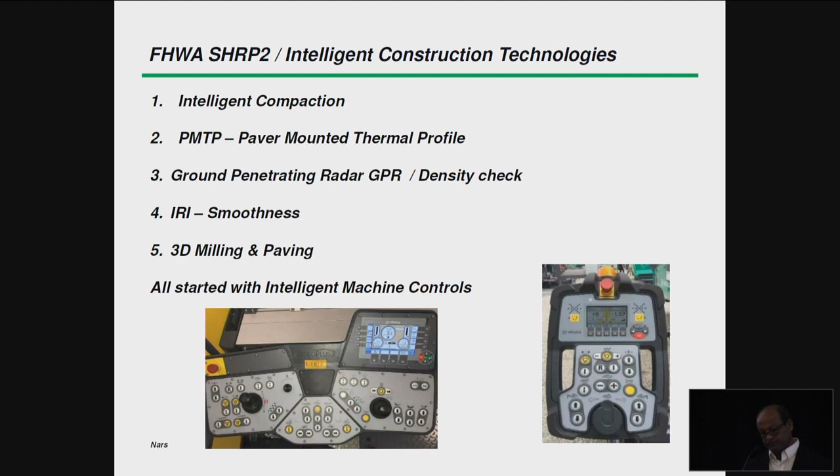Let's do a quick review of what an asphalt paver is and a free-floating screed. An asphalt paver consists of a tractor and a screed. There are several types of screeds, but as far as 3D paving is concerned, it does not matter. The tractor is attached to the screed arm where it pulls the screed at what we call the tow point or pull point. The tractor is connected to the screed through the leveling arm, which is connected to the screed arm. The screed itself pivots on each side onto the screed arm. There's a screw we refer to as a thickness control screw that the operator could manually increase or decrease the mat depth. If the operator turns that screw, he will momentarily increase what we refer to as the equilibrium angle of attack.

The operator could also leave the screw alone and jog what we refer to as the tow point cylinder. So when the operator turns the screw, he's increasing or decreasing that angle of attack. He could achieve the same by running that tow point cylinder up and down. The tow point cylinder is connected to the leveling arm, which is connected to the screed arm. So if I run that up, I could increase that angle. If I run it down, I could decrease the angle. So that's two ways the operator could increase or decrease the mat depth.

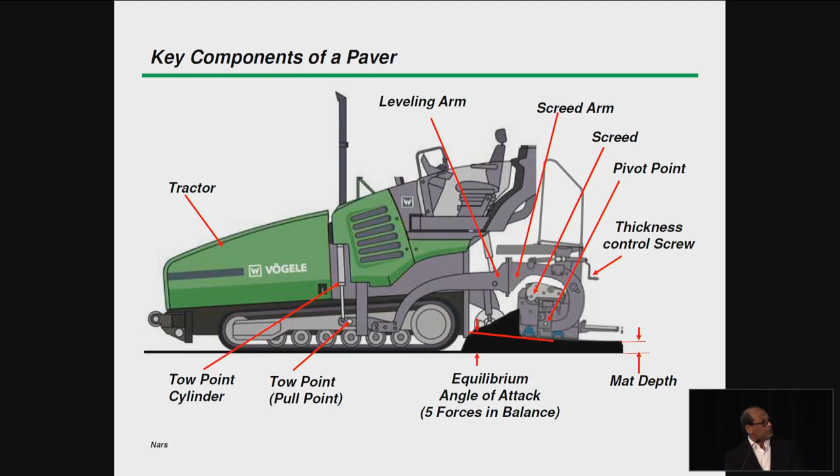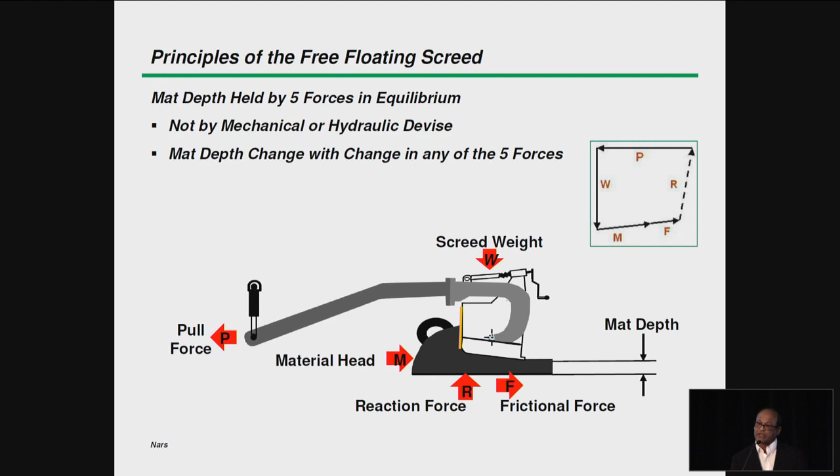We could also use an automatic grade and slope system to follow a known reference to accomplish the same. That reference could be a physical reference or it could be 3D coordinates. The screed is held to grade by 5 forces. Any change in those 5 forces would also cause a change in the mat depth. So we could manually change the mat depth, we could automatically change the mat depth, or the mat depth could change unknowing to us if any of those 5 forces changes.

So we could increase the mat depth manually using a thickness control screw or using the tow point, or we can automatically increase or decrease the mat depth with an automatic grade and slope system. Whenever we make those changes, it takes 3 to 5 times the length of the tow arm for the screed to find its new equilibrium position. So the screed is like a water skier being pulled by a boat. When you make a change, it takes time for it to find those 5 forces back in balance to seek the new grade.

So I could increase my mat depth by turning the screw or by using the tow point cylinders.

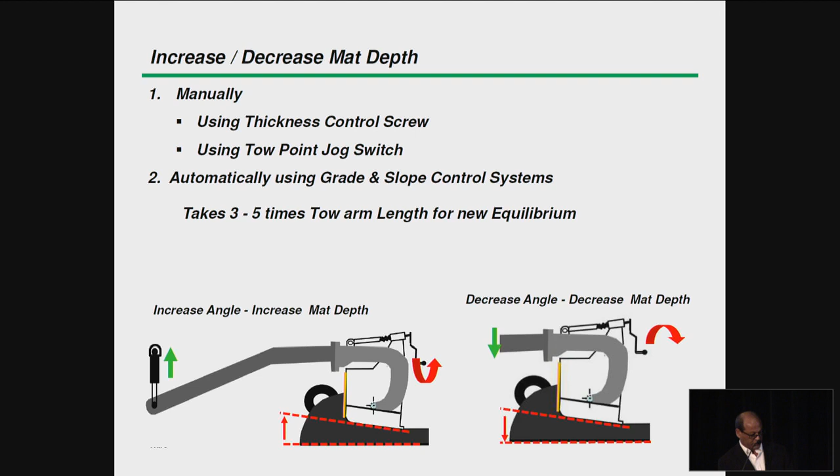So if we use an automatic grade and slope system to control the mat depth, we could either use a physical reference or we can use 3D coordinates.

As the tractor goes in and out of the highs and lows, if we have a known reference, assuming that the front wheels go into that dip, the tow point cylinder will go down. When we say the tow point goes down, we change mat depth. But we also say it takes 3 to 5 times the length of the tow arm for the screed to reach its new equilibrium point. So a short variation in the mat depth does not give the screed enough time to react, so it would fill that mat depth. When we get into longer swales, the screed could react and carry the depth in.

If we use an automatic grade and slope system, we can follow a known reference and compensate for those variations in the base, whilst at the same time compensate for variation in changes of the 5 forces that hold the screed to grade.

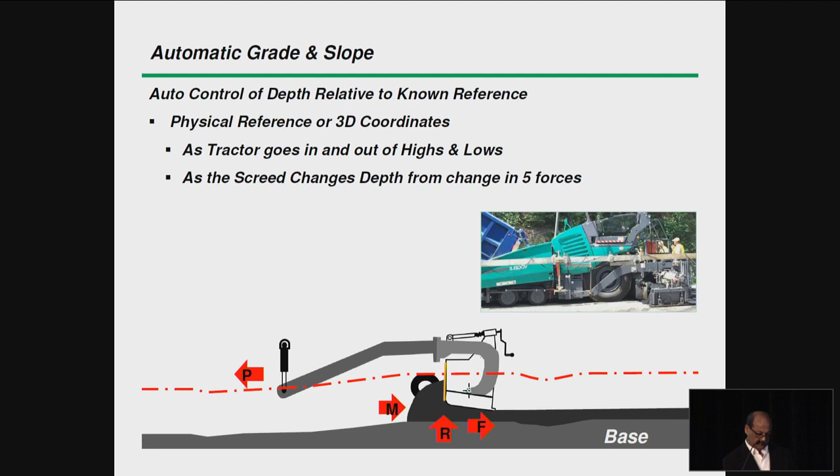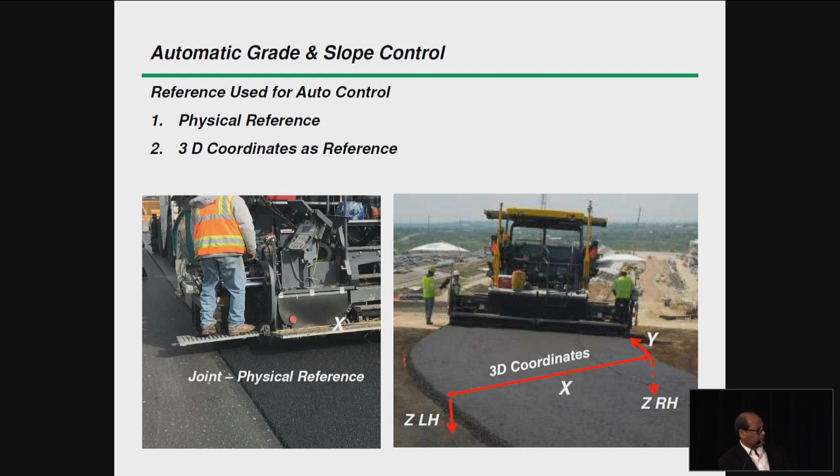So, following a physical reference using an automatic grade and slope system, we need three things: we need the physical reference, we need a sensor to monitor the reference, and we need a machine control. So the sensor monitors the reference and tells the machine control what to do. And it's really easy - it's up or down, left, up or down, right.

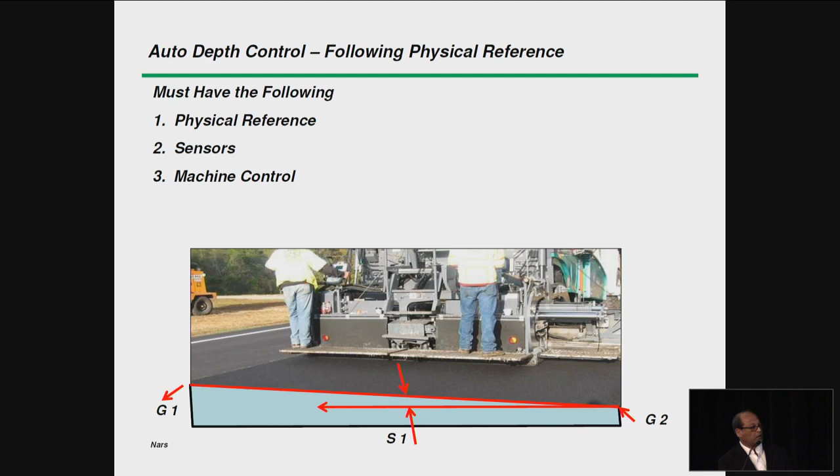So we can control depth, or we can control all three dimensions of the pavement. First we'll look at controlling depth only, which is what we do mostly today. It's controlling depth. On rare occasions, we control all three dimensions of the pavement automatically.

So reference sensors are usually a joint, a string line, a curb, or we can use an averaging ski and average the base.

Sensors could be the sensor that reads the joint, which we refer to as a joint matcher. Or we read the slope of the pavement with a slope sensor mounted on a beam that attached to the tow arms that control the mat depth.

So when we're using physical reference, it's usually a joint sensor or a slope sensor, or a joint sensor and a slope sensor. We can run joint on one side and slope on the other side. So we control the depth on one side of the pavement, and we hold a cross slope of the pavement.

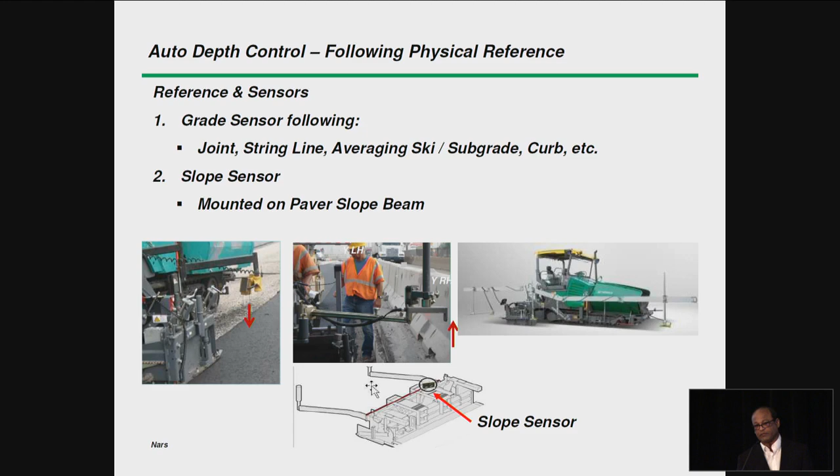Machine controls could be integrated controls to the paver control, or it could be a third-party system. You'll hear these names over and over in my presentation: Topcon, Leica, or Trimble, which are the three big players in positioning instruments.

Machine controls are usually on the paver. So we could have an integrated control system where the sensor talks to the integrated control to control your grade. Or we can have a third-party system to tell the machine what to do.

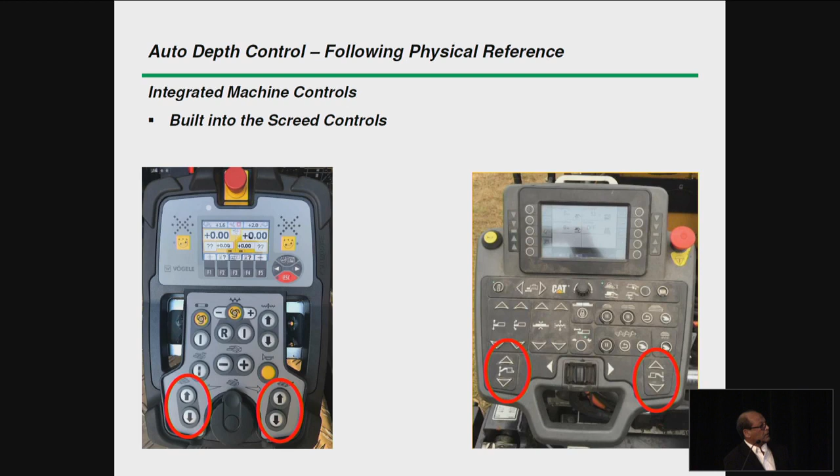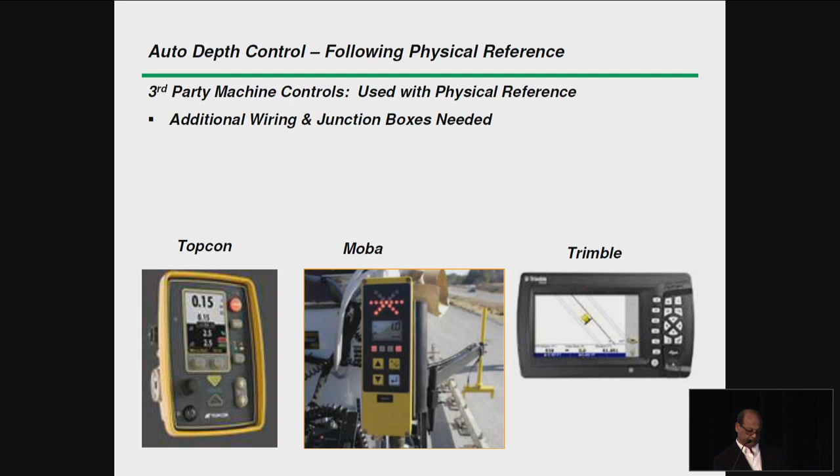So that's following physical reference. Why 3D? 3D eliminates the need for physical reference. Physical reference sometimes could be very expensive, especially if it's a new project and you have no reference to go off. So 3D systems eliminate the need for physical reference.

It's usually safer because you have less trip points. And you can use the same 3D positioning instruments for all the dirt work. So you notice I'm focusing on 3D positioning instruments, and 3D and machine controls.

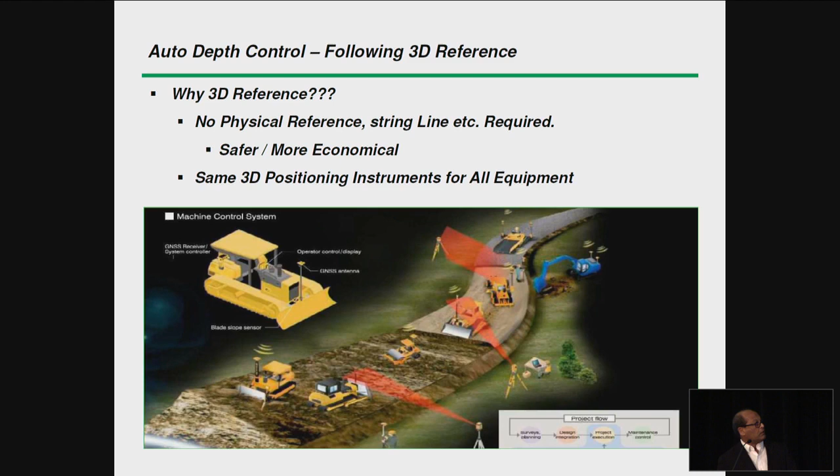So if we're paving, controlling depth with 3D, we could eliminate the need for expensive string line. As you can see here, that's a brand new project. There's no reference to go off. Where would the operator steer off?

To maximize smoothness, maximize your joint, to have a proper joint, you have to steer a straight line. To steer a straight line, the operator needs a reference. So if it's a new project, you have to survey it and put survey stakes down for the operator to follow. We can use the same string line as a reference to control the grade. That could get very expensive.

If it's a new project, the file's already designed, it's already available, we can take that information and plug it back into the paver and let the paver follow that reference.

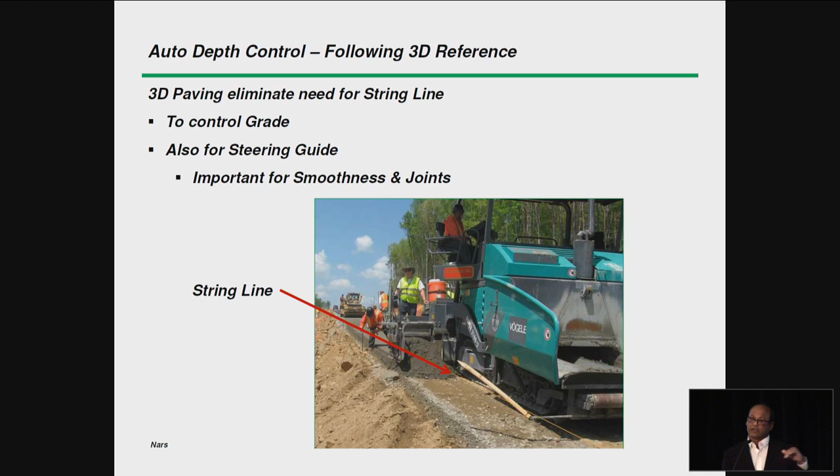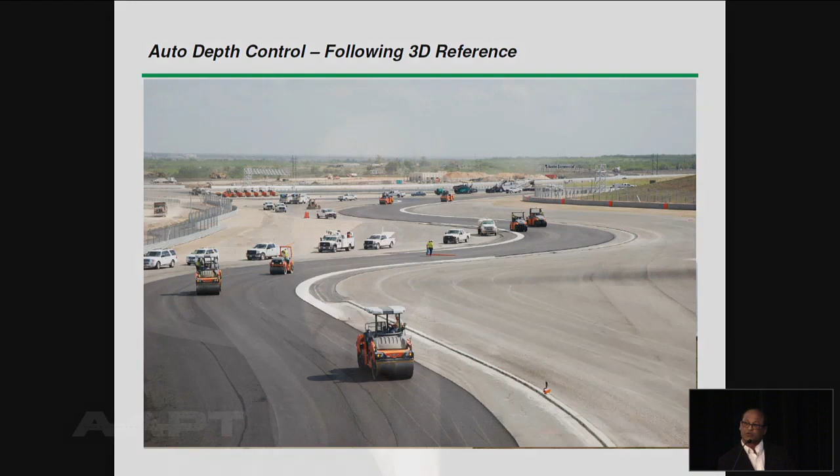These are some typical applications where 3D becomes very handy. As you can see here, that's a very complicated or complex profile of the pavement. So if we could steer the paver with the 3D job file, it makes it a whole lot easier for the operator to maintain consistency of those curves.

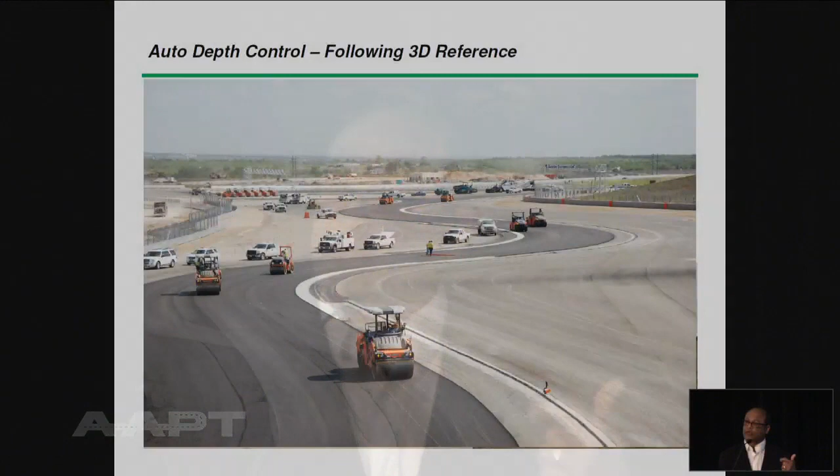So we have a better product at the end. It also eliminates the need for the manual input of the operator to follow that complex pavement. So 3D also eliminates the manual input.

We could also do 3D mill. If we do 3D mill, then we already establish a smooth base that the free-floating screed could follow. So if the base is smooth, and we can always profile it and tell how smooth the base is, so more than likely, if you do 3D mill, you don't have to do 3D pave because we already established a smooth base.

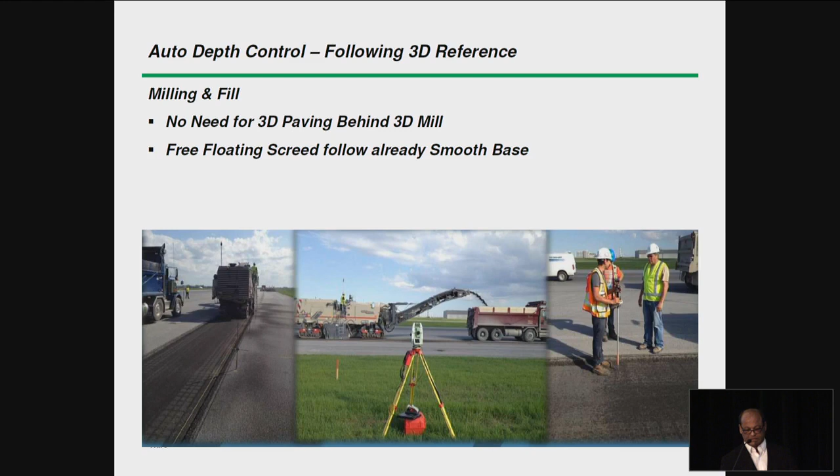So to do 3D paving, these are the things we need. We need 3D job files. We need 3D positioning instruments to tell the paver where it's at and what the depth needs to be, what the width of the pavement needs to be, what direction the paver needs to go. And then we need machine controls to take that information and control the machine. So three things we need are 3D files, 3D positioning instruments, and machine control.

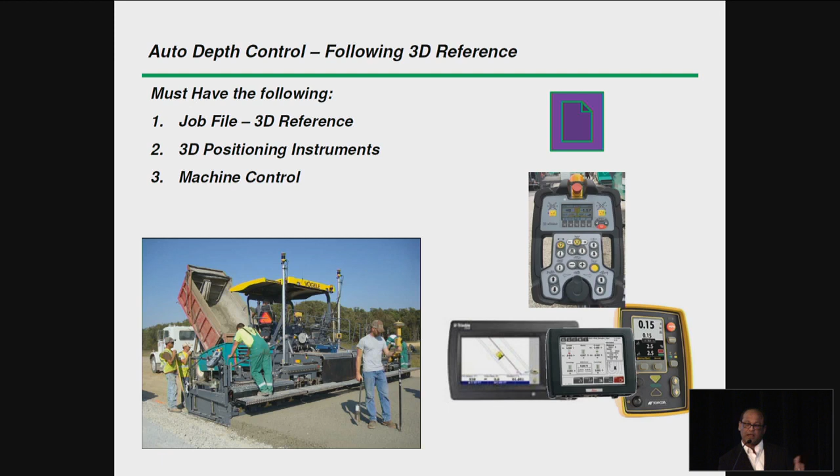The 3D files could be for a new project, the design file, or for an existing project, existing pavement, we can scan the pavement either with a high-speed scanner or we can survey it. Then we can take that information and build a 3D file. Then take that and feed it back into the paver and let the paver control the depth of the pavement based on the information we input into it.

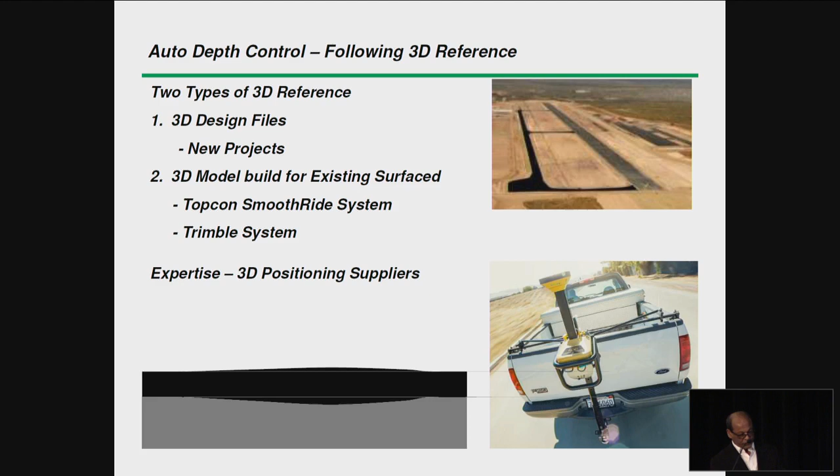So let's say we have an existing base that's got highs and lows. When we scan that surface, we can find the low spot, we can add X amount of material for roll down. So when the paver comes by, it puts X amount of material to compensate for the low spot, so when the roller comes by, we have a smoother pavement.

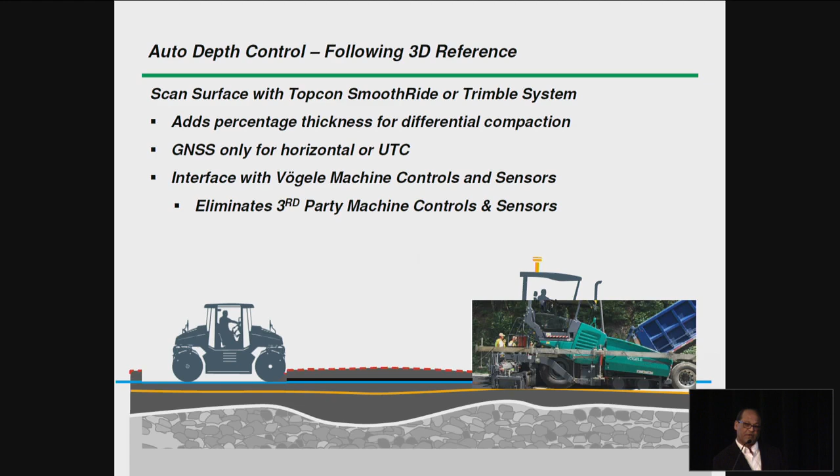These are latest technology, these are evolving technologies. This type of technology could eliminate the need for, in some cases, doing a leveling course to create a smooth base before we do the final pavement. So these are some of the advantages of this type of technology.

There are 2 types of 3D positioning instruments. There is what we call UTS, Universal Total Station, or millimeter GPS. They're from different suppliers. UTS uses a universal total station, and millimeter GPS uses satellite and GPS for location, for X and Ys.

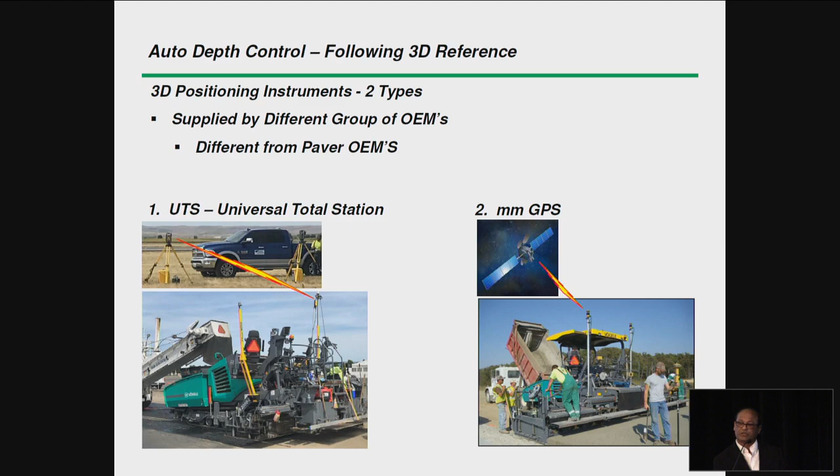UTS has to use multiple stations so you can pick up from one to the other and not lose control. You would need at least 3 total stations if you use the UTS technology: 1 for tracking, 1 for transition from one to the other, and of course we always need to constantly check grade because remember, input equals output. So we need another total station for grade checking.

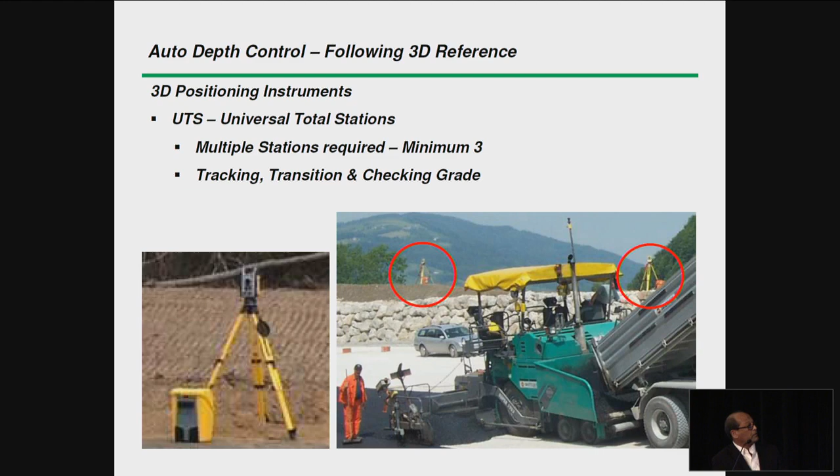These are some of the typical instruments that are used for 3D positioning or 3D paving. So we have the total station. We need control points for the total station to work off. The total station communicates with the machine target to tell the machine where it's at. All these instruments are communicating with each other through a radio signal, so we need that.

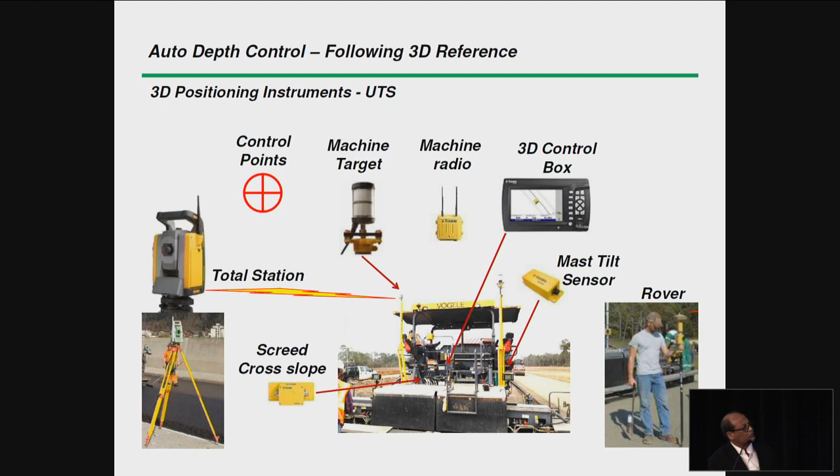Then we have the 3D control box, which takes the 3D file and tells the paver what to do. It talks to the machine control. Of course, we need to sense the mast. If we're going in and out of super elevation, we need to calculate when the mast is tilting so we can recalculate the X and Y. We also need a slope sensor that will tell us the cross slope of the pavement. And of course we need a rover to constantly check the mat depth to make sure that we're getting what we expect. So that's some of the stuff used with the universal total station system.

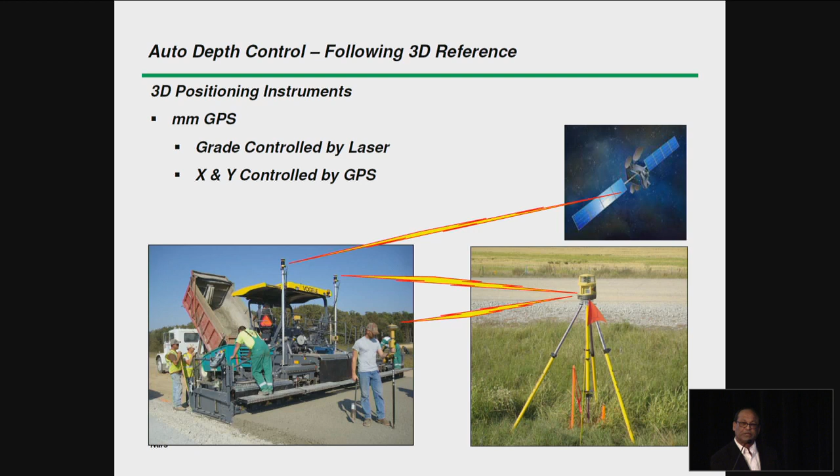The millimeter GPS, of course, needs satellite to tell us where we're at. Usually millimeter GPS is not accurate enough for the accuracy we're looking for in depth. So whenever you use millimeter GPS, we use a laser to give us the mat depth. So millimeter GPS positions the paver, laser tells us what the depth is. With this concept, you have the GPS system, GPS and laser system. Again, you have a 3D control box. And of course we also need a rover to constantly check our mat depth.

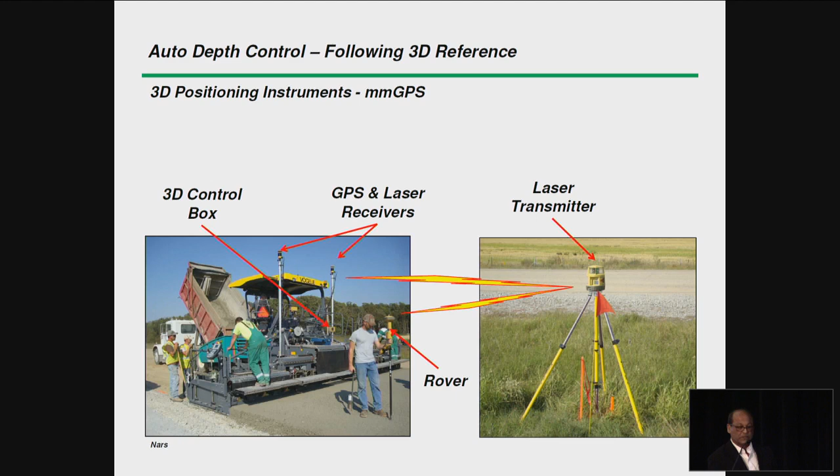Pros and cons for these systems. Usually when you use the UTS system, you need multiple stations, and you have to be careful that you don't have blockage with your total station. If a truck goes by or a wall gets in front of you, you block your signal and lose your position. So that's typically one of the disadvantages, along with needing multiple stations. You can have obstructions like walls, overpasses, bridges, trees, those types of things that block your signal and you lose your X and Y position.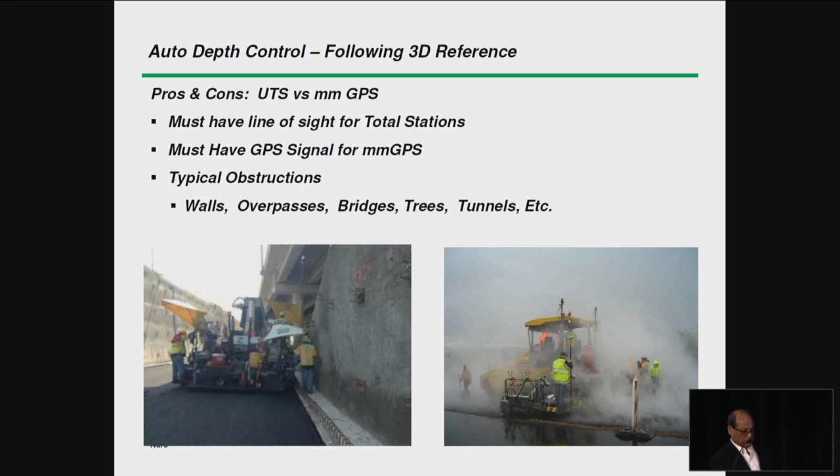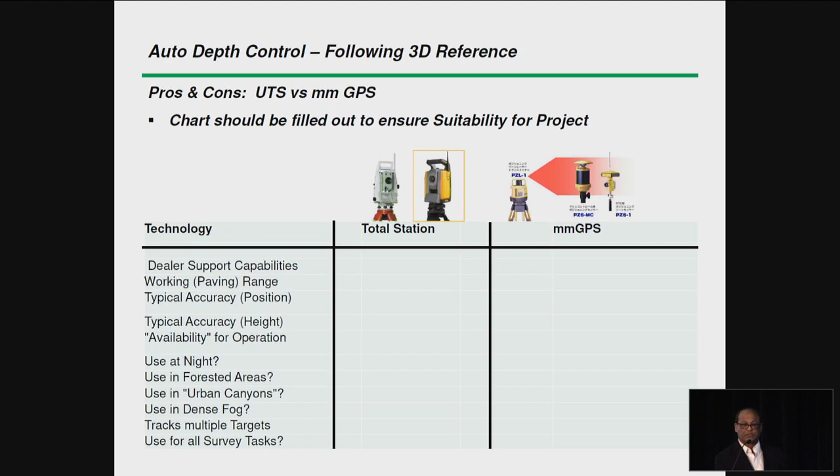To determine what's best for your project, there are several things you need to look into, and you can see some of them there. I'm not going to go through it line by line, but if you choose to get into a project like these, you need to investigate your project, look at the pros and cons of the UTS system and the millimeter GPS, and then determine which is more appropriate for your project.

We always have to constantly check mat depth because input equals output. If your file's incorrect, it tells the paver what to do, and the paver will do it. So we have to be very careful that we have knowledgeable people available when using these types of projects. There are two groups of knowledge: machine control knowledge and 3D positioning knowledge. 3D positioning knowledge also includes creating a 3D file, so you need surveying knowledge, positioning instrument knowledge, and machine knowledge, which includes paving knowledge. That's usually difficult to find.

What we find mostly on projects is the 3D positioning guys get involved, sell the contractor the package, start it up, and walk away. Because the machine lays the pavement, most of the blame goes to the machine. So it's very critical, if possible, to specify the knowledge required for projects like these. The contractor must have the knowledge to run these types of projects, otherwise you can quickly get into millions of dollars of lawsuits, which I've seen in the past.

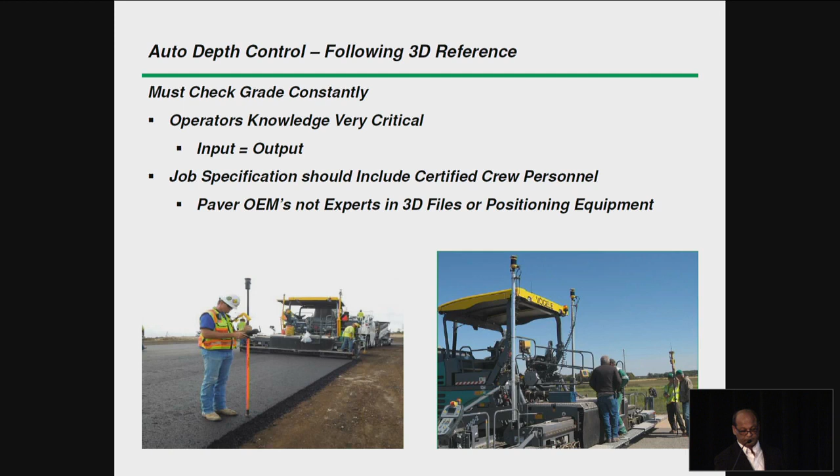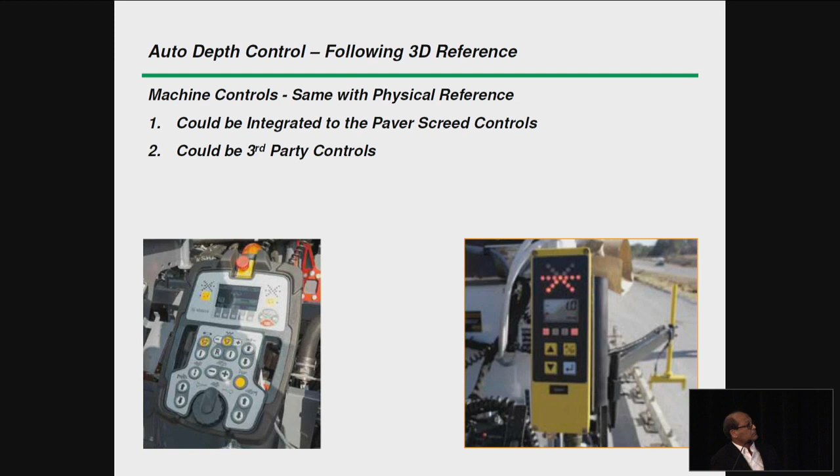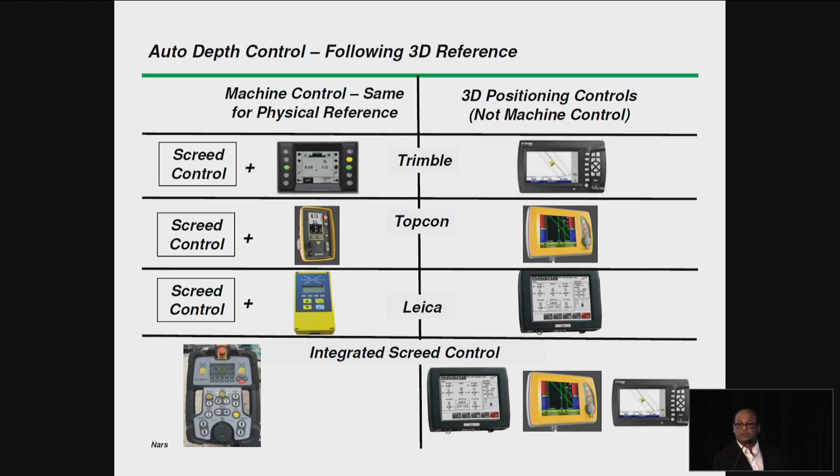If you use a Trimble system, then you need a Trimble 3D positioning box, a 3D machine control, and screed control. Likewise for Topcon or Leica. If you use an integrated machine control, then you avoid those additional instruments, additional wiring, and junction boxes.

So, controlling depth, width, and direction. So far we looked at controlling depth. We could also steer the paver and control its direction. So now we can take a 3D job file and do depth. Our industry today refers to depth alone as 2D paving. That's incorrect. 2D paving is controlling depth and controlling width.

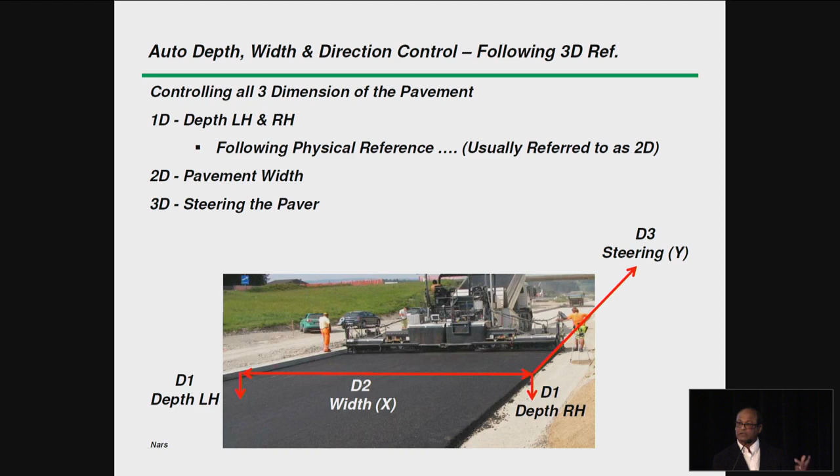That's two dimensions. What our industry refers to as 2D paving is actually following a physical reference. Following a 3D job file, you can control the depth, the width, and the steering based on the file. Again, we need 3D positioning instruments and machine control. But now that we're controlling all three dimensions, we need additional sensors on the paver: a sensor to tell us the width of the screed, and sensors to tell us the direction the paver needs to go. All of that now belongs to the machine control.

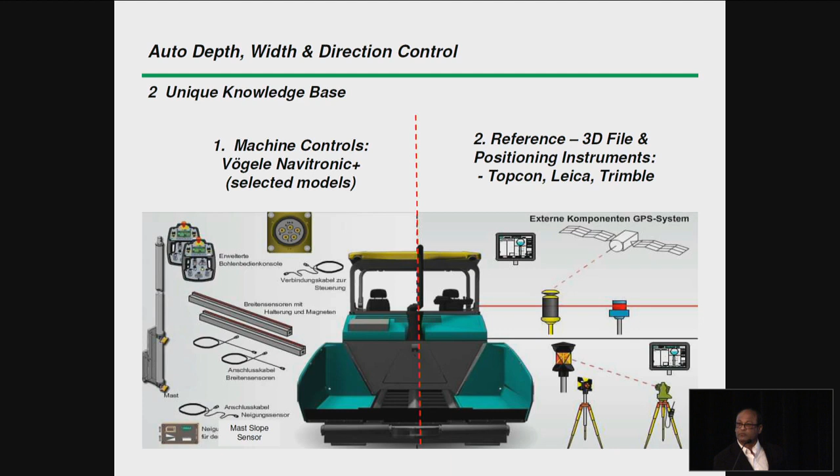So again, two groups of knowledge: machine and 3D positioning. That's my 20 minutes. We've left some time for questions.

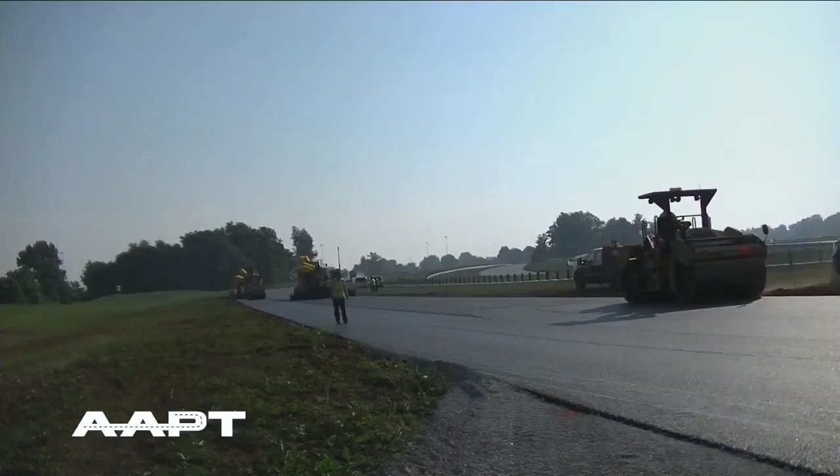Achieving the required smoothness was the challenge. Technology that included 3D paving helped every inch of the way, from the first pass of the scraper during site preparation to the last roll of the finished compactor.

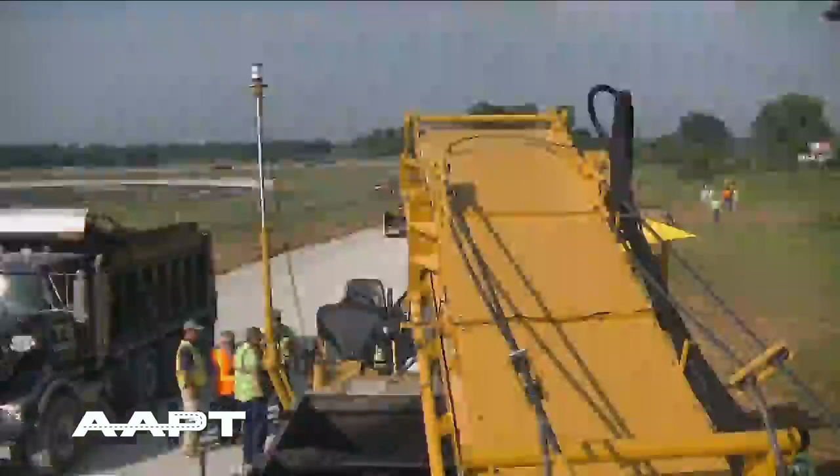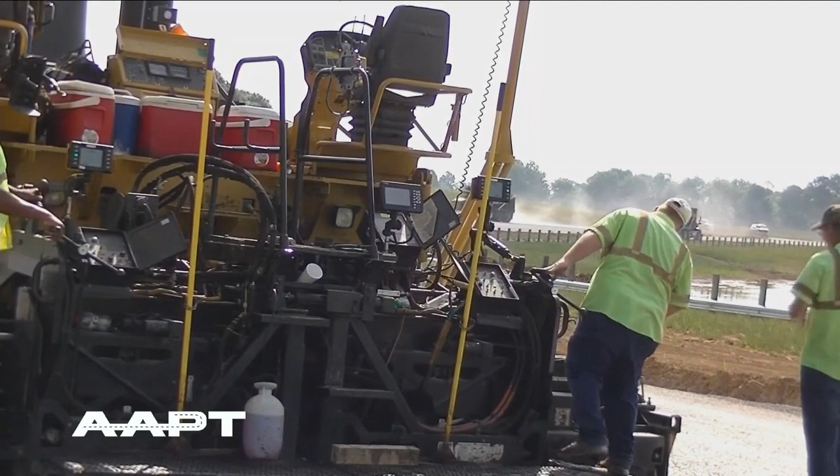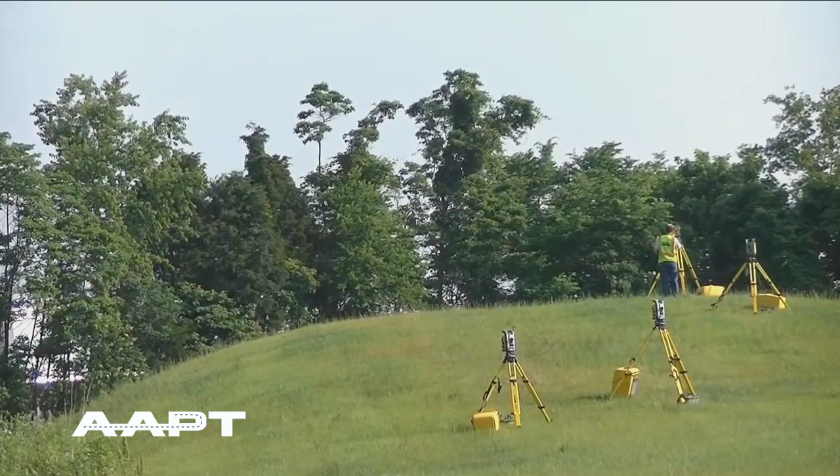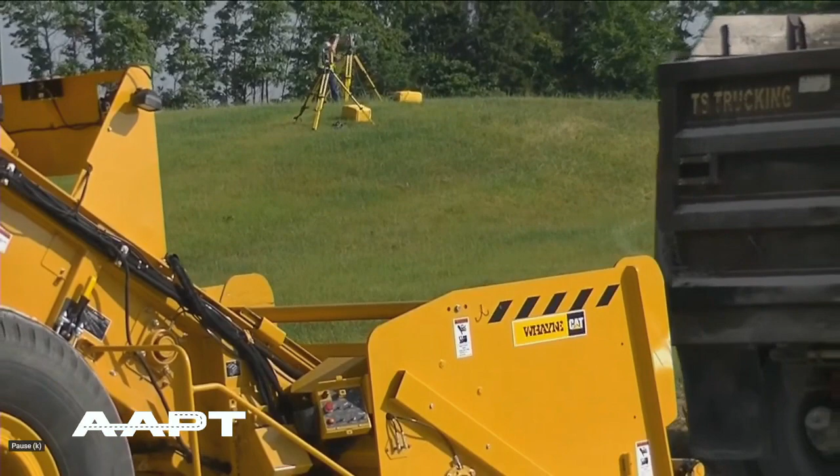In this case, when we're doing the 3D paving, the contractor, Scotty's Contracting, has come in and built 3D models, and we put those on the paving systems, on the particular Trimble system here, on the Caterpillar pavers. We've got a full 2D sonic system on it, and so we have two operators boxes with that on it. We also have another operators box that runs our PCS 900 system, which is our robotics paving system. We have multiple robots set up, and in this case they're running what they call echelon, so they run two pavers staggered in succession. We have multiple robots tracking both pavers, and as they get out of range of one robotic system, the next one picks them up. So you'll see out here as many as six robots set up at one time.

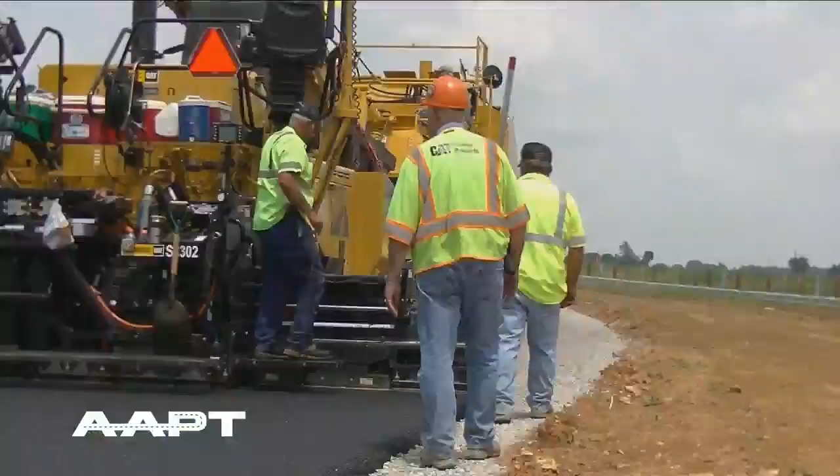The technology ensured steps were taken throughout the process to deliver tolerances within thousandths of a foot. The biggest advantage for the 3D paving would be the accuracies needed to achieve for the Corvette racetrack here, and so we're able to hold those in the thousandths. The advanced technology delivered incredible smoothness results while also having a significant impact on cost. Technology cuts our labor force down.

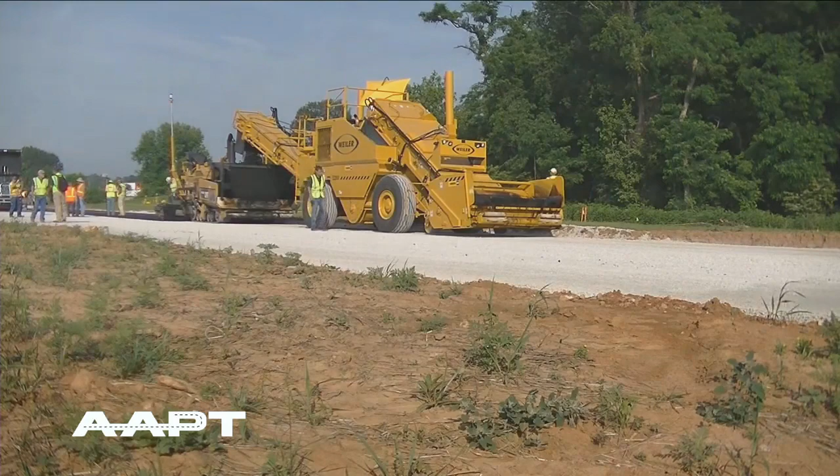We don't spend near as much. When we save money, that enables us to bid cheaper and to win bids, and our company prospers with those things.

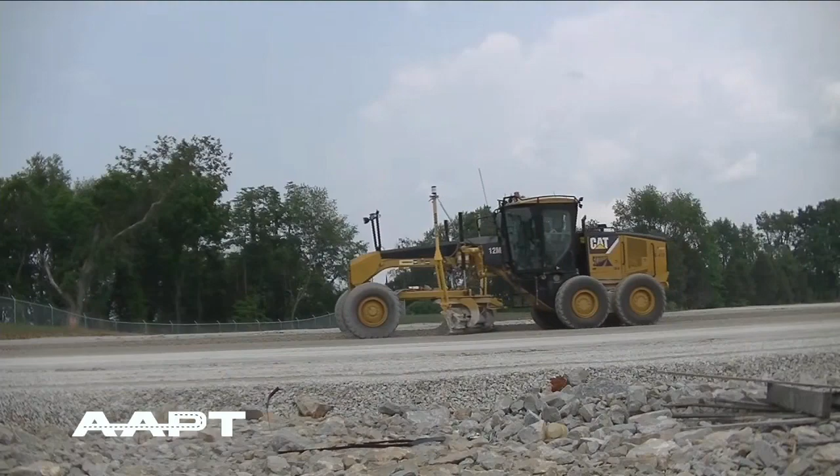Time pressures also were a part of the job, and once again it was technology to the rescue. In this case, the technology enabled work to begin before all plans were finalized. The Corvette Museum wanted to start the project, but they did not have it fully designed yet. The engineer was working extra hours, but it just wasn't quite ready yet. So we did somewhat of a phased construction, design build. With the changes, the way they came in, we were constantly updating the modeling parameters out to the machines. Those kind of changes are not feasible to come out and stake and do that with conventional methods.

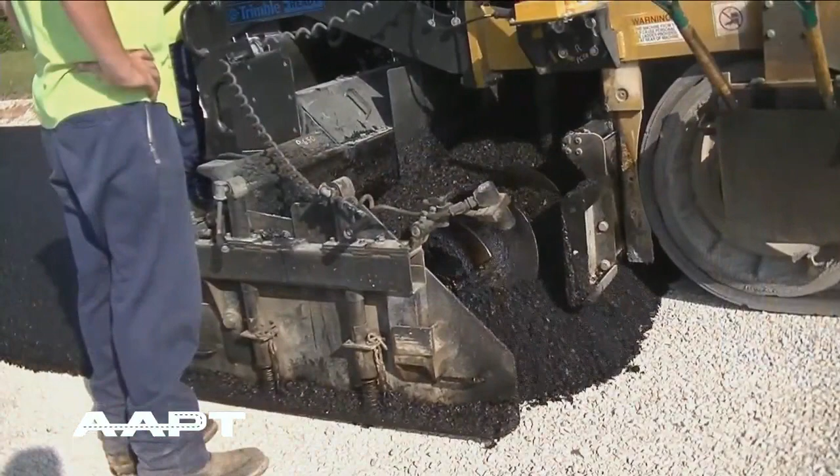Was the job a success? Corvette official Mitch Wright certainly thinks so. They can hold tolerances to an extremely tight level, and what that's going to allow us to do and provide us is a hyper smooth racetrack. I believe we're going to be the envy of the industry with the surface that we're going to have.

Thank you to our AV guys for getting that queued up and showing that video. One I thought would be of good interest, and just to let you know, a few good things come out of Kentucky besides Del Decker, myself, and Cami Armabu. By the way, Cami R, it's good to see you at AAPT this year, and good to have you here.

With that, again, I want to encourage you as you begin to look at these technologies that you see, think about how those will blend in the future. It may not be in the exact form that you're seeing now, but it may be something a lot different.

Where's Becky? I'm looking at Becky. Becky, you remember when we had the Superpave level 1, 2, and 3, and that big SST sitting in your place, and we had them in all the different Superpave centers. We were trying to figure out how in the world this big machine that Jim Cox had designed was going to fit in these laboratories or in the DOTs, and who was going to run them. But that was a vision that we had back in '98, and today that vision is not that big unit. However, it's the smaller AMPT unit that's doing a very good job. So it may change in size and may change in how it works, but ultimately we're all moving the same direction.

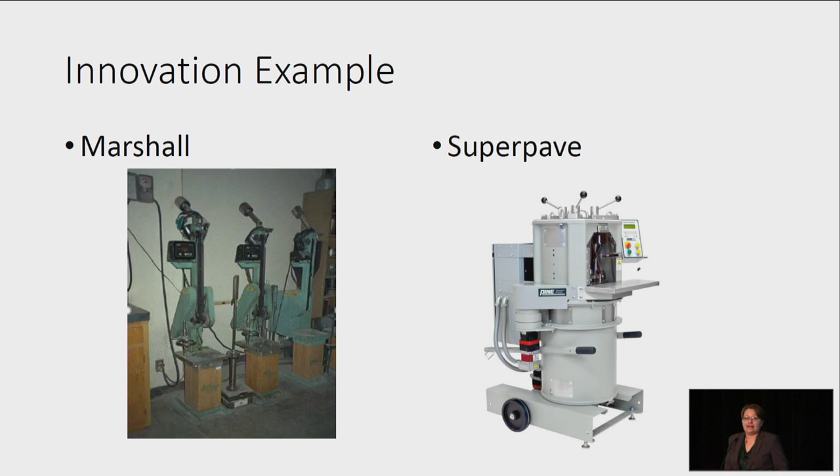I also want to point out that due to SHRP, there's been more than 100 new devices, tests, and specifications, and it also brought about innovation through AASHTO, FHWA, and TRB. This program had a lasting impact on our industry.

Another example of innovation that came out of SHRP initially was G-star divided by sine delta. While at the time this was a great innovation that allowed us to move forward with our PG binder specification, it did not account for what was coming next - elastomeric binders, heavier loads, slower traffic. G-star sine delta was not prepared to deal with that.

So the development of MSCR came about because grade bumping was not going to cut it. We could not test our binders at 70 degrees Celsius when we were actually in a climate that needed 58. The development of MSCR was truly an innovative idea, and it's pushing us forward. I hope it's pushing people to stop using PG plus specifications.

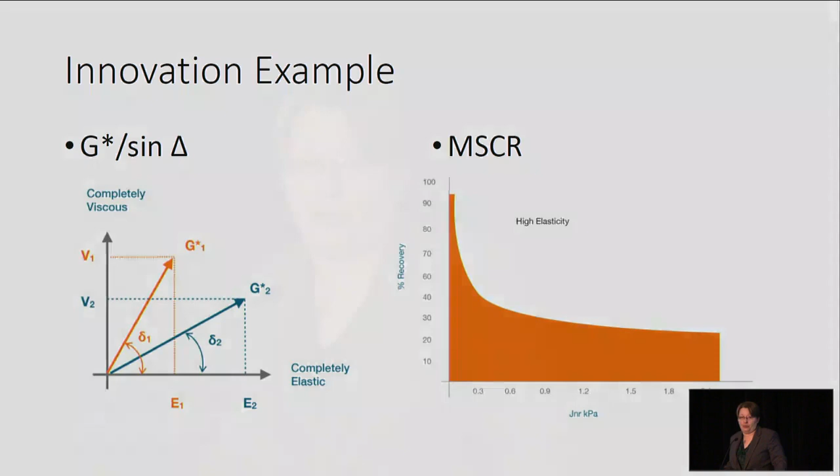Jnr has better correlation with elasticity, and the MSCR test in general is more stress sensitive, so we can better predict which pavements will and will not rut. Another great innovative idea that has come about recently.

The last example of innovation I want to talk about is asphalt binder content. Asphalt binder content has been a key component of our agency specifications where I work for as long as I can remember, and there have been many iterations of trying to figure out how to get the asphalt content. Reflux is a test - in fact, we still run it in one of our states. It requires over 24 hours to get an answer. It requires a technician to be very hands-on and takes a lot of time to run. It's very accurate, it gets you the right number, but it's very labor intensive.

It was also very ripe for automation, and one of the automations that happened was centrifuge. Now we can run it faster, it takes less technician time, and it's also still very accurate. There is one area that we're still developing: ignition ovens are now a thing we're using, which somewhat eliminates our need for chemicals, which is a safety issue. However, when we use ignition ovens, we still need to use chemicals to determine correction factors. So there's still innovations coming today in this area, and it's one we'll talk about later.

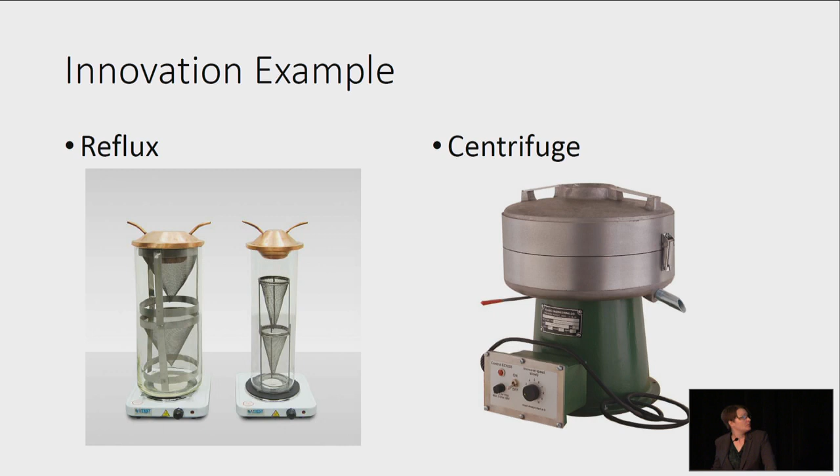Next thing I want to talk about is what specifically is automation. Automation typically refers to something that exists and functions as an independent process. We have been using automation to make our lives simpler for years. It works because most people don't like repeating the same task over and over again - they'd rather be doing something else. We can never get enough, as some people like to say.

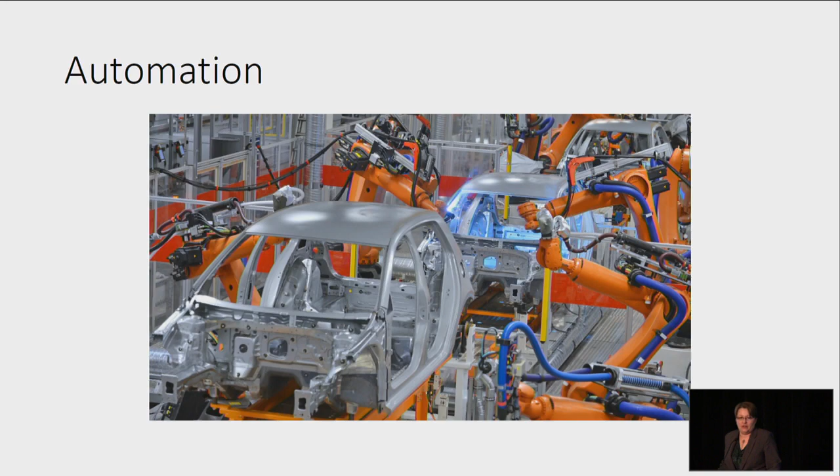So as much as people might be concerned about job elimination, there will always be something else that we want. Just because we automate does not mean we will stop innovating, and those innovations will result in other things we want to do, like yoga or Pokemon Go. We're always going to find something to fill our time. Automation will give us that ability.

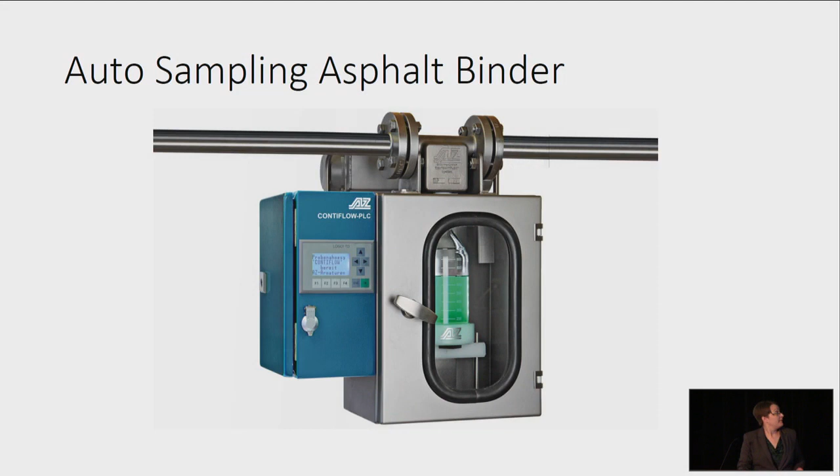This is something being used in other industries, and if any of you are using it in the asphalt industry, I'd be really excited to hear about it and talk to you. This is an automated asphalt binder sampler. It's the only one that I know of, so I'm not promoting the brand - it's just the only one I'm aware of at this time. Hopefully there's more coming out on the market.

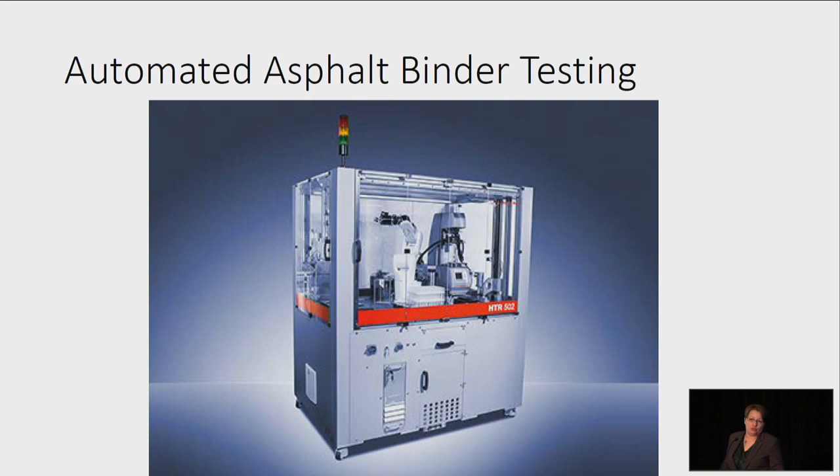This machine will take your samples and run your DSRs and MSCRs without any human intervention. You can preload the samples, have it all set up, and it will run all night long. You can also integrate it with the asphalt binder sampling I just showed you previously - you could pull a truck sample, have it hooked up to this piece of instrumentation, run the sample, and have the results automatically reported every time a truck is loaded. You could literally have the data before the truck leaves the site.

I have been on the other end of the truck leaving the terminal, and the material's been placed, and then I get the data, and it failed. It is not a great feeling to know I was responsible for that material, and our company put it down because I told them it was okay, and it wasn't. This could actually eliminate that truck ever leaving the site. How great would that be?

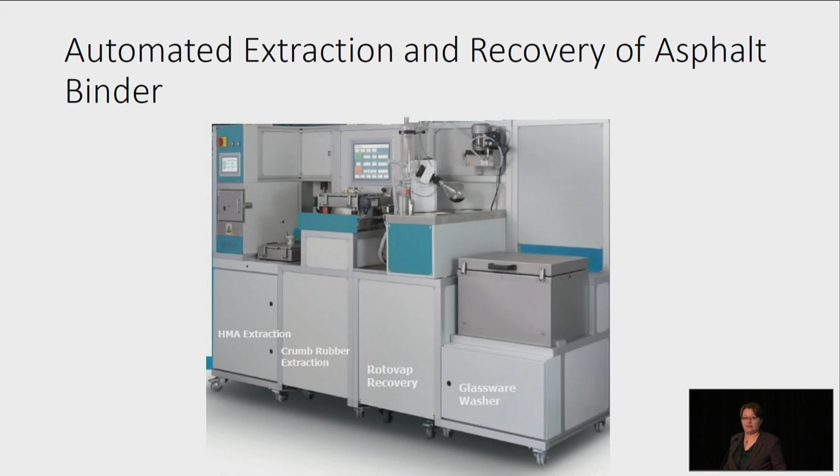In this latest update to the system, it now includes rotovap recovery. So you can take the sample of aggregate, hot mix asphalt, put it in here, get your dried aggregates out, and now you can also have it automatically recover your asphalt for you. This is huge. These kind of innovations are what we need in our industry.

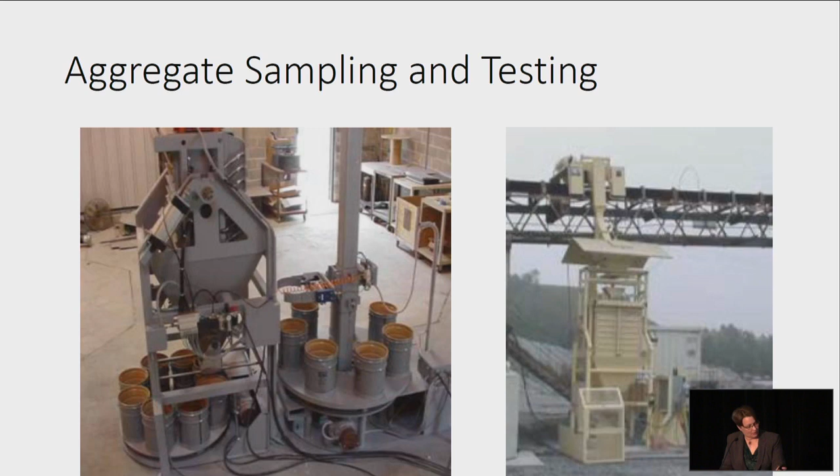This is available today. And it's another thing that if anybody's using, I would be really excited to talk to you about. I think this is the next generation of QC testing. We can do it better, we can do it faster, we can do it more often. And our QC will only get better because of it.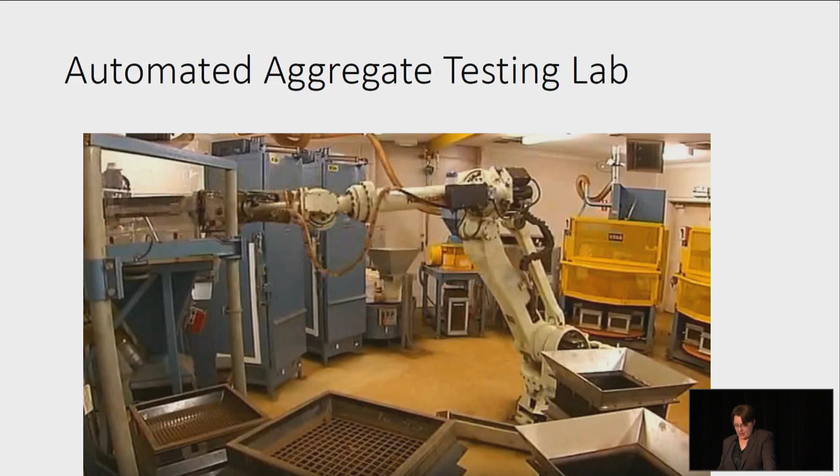One thing I want to talk about is our current process for moisture. You can put a moisture meter on your belt for your aggregates going to the asphalt plant, and it will give you moisture on the spot.

I don't think a lot of people are currently using moisture meter analyzers, but I think it's something we really need to consider. Our current process is to have a technician get up at an ungodly hour in the morning, arrive at the asphalt plant before anybody else, go and grab aggregate samples from the stockpiles, and run moistures on them so that when the plant is ready to fire, we can make an aggregate correction.

I find this to be ridiculous, quite honestly. And I know our technicians would appreciate that extra couple hours of sleep. So let's get more moisture analyzers on our belts.

It's better. You will get what the actual moisture is rather than what it was 2 hours ago. I know where I live, you can have a rain event that lasts for a couple hours, and now that technician is running out and trying to get moistures again. We're constantly playing catch up with our moistures to do asphalt binder corrections.

And we've already talked about asphalt binder content being a very important part of what we do. So let's do it better. Let's not be guessing what our moisture content is when the equipment's available to get it right.

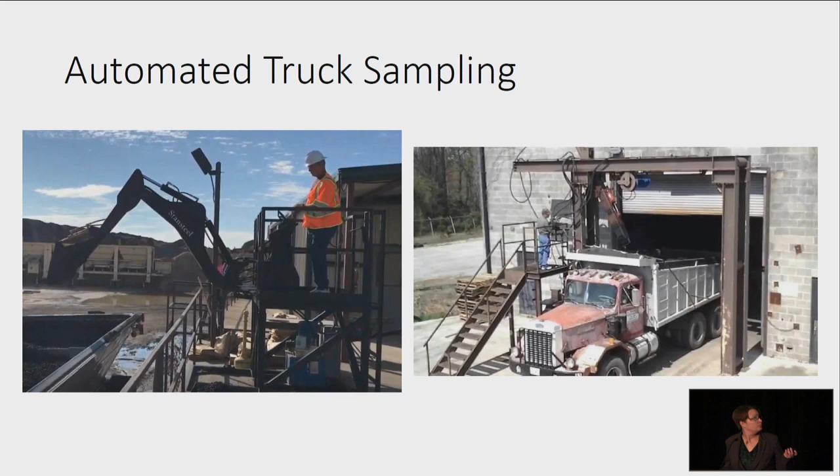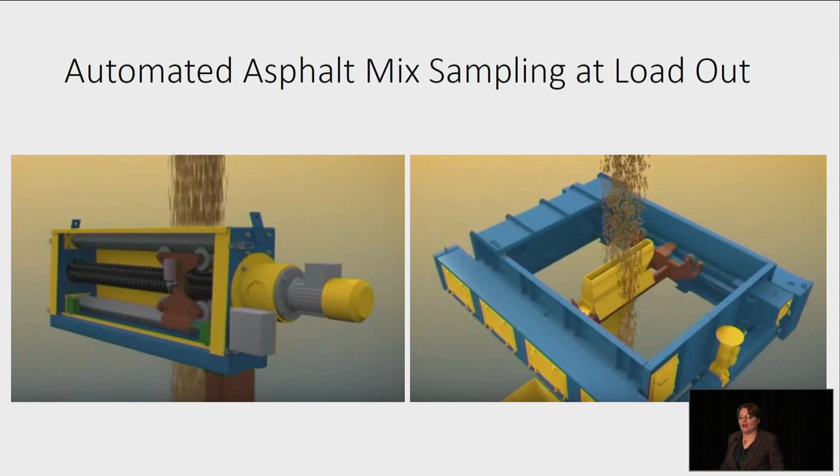Taking it to the next level, this is something that's conceptual, and perhaps somebody's using it and I just don't know about it: automated asphalt mix sampling at loadout. There is stream sampling being done in all kinds of industries. And while I realize we have unique challenges with temperature, and asphalt binder sticks to everything, why wouldn't we consider taking a sample while the mix is already moving? Grab it before it gets in the truck, and then this material can be delivered to an ignition oven, to a gyratory. We can automate everything in our lab.

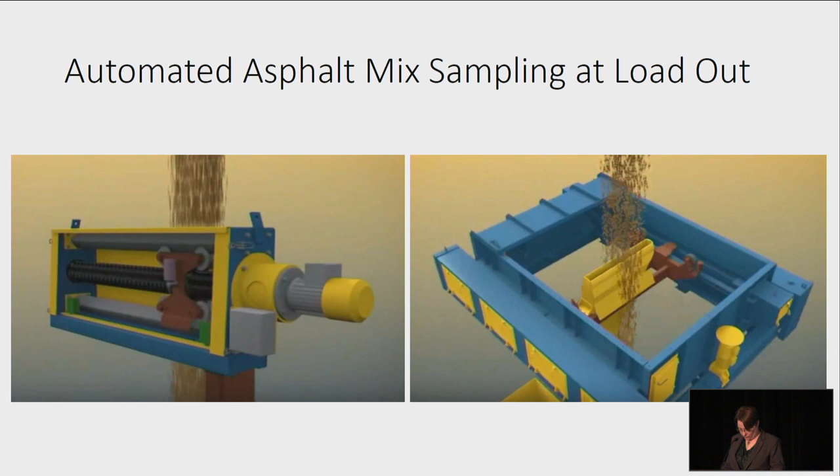So what I'm talking about now is fully automated QC testing. There isn't a single test that we currently do in our QC lab that can't be automated. There is nothing unique or special about getting a bulk, about running a gyratory, or about getting a binder content. It can all be done with robotics.

So imagine that you're taking a swipe from the haul truck. You're splitting the sample out into its components, just like a human would do, but it's quite obvious to me that a robot could easily split out an aggregate sample. You're depositing part of the sample into an ignition oven or into an extraction system. You're delivering material to a gyratory. All of the testing that we do can be automated.

My vision for the future is a fully automated QC lab. It gives us better quality control. It takes away the human potential for error. It gives our customers more of what they're asking for, which is better quality control. As these types of things become more available, our customers start to demand them. And I think we're going to be a lot better off if we're setting the bar rather than them.

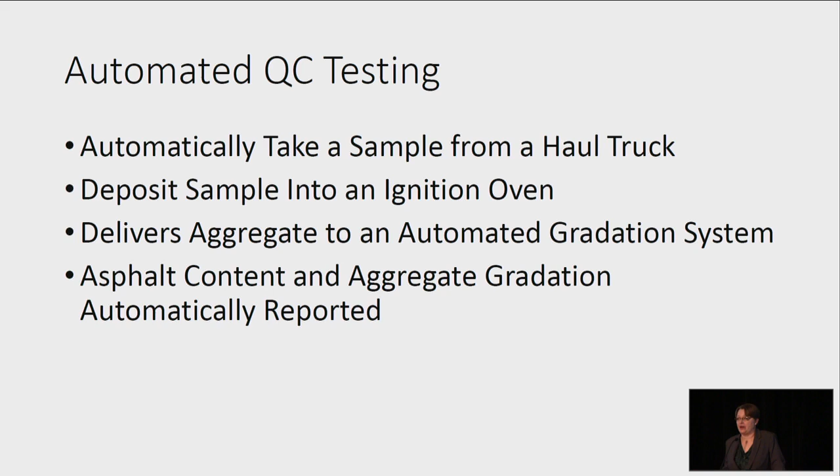So, done enough talking about QC. I want to talk a little bit about some of the developments in the field. Once again, some of these are available, some of them are conceptual.

Intelligent compaction. I had an opportunity this last summer to work with an automated rolling system and talk to the roller operators about how they currently do things. Especially when they're rolling in the dark, they're struggling. Where have I rolled? How far have I rolled? How many times have I hit that spot?

We equipped them with pass mapping technology, and we got positive results across the board from every operator - new operators, and people who've been operating rollers for 30-plus years who you wouldn't expect to want to change or think they knew how to do it better. All of them wanted this technology on their rollers. They all wanted the opportunity to get their pass mapping exactly right. They all wanted to do the best job they can, and they all saw how this technology could help them do that.

The other thing that's slowly becoming available - I'm not totally bought in that it's quite ready yet - is the ability to get automatic density feedback from our rollers.

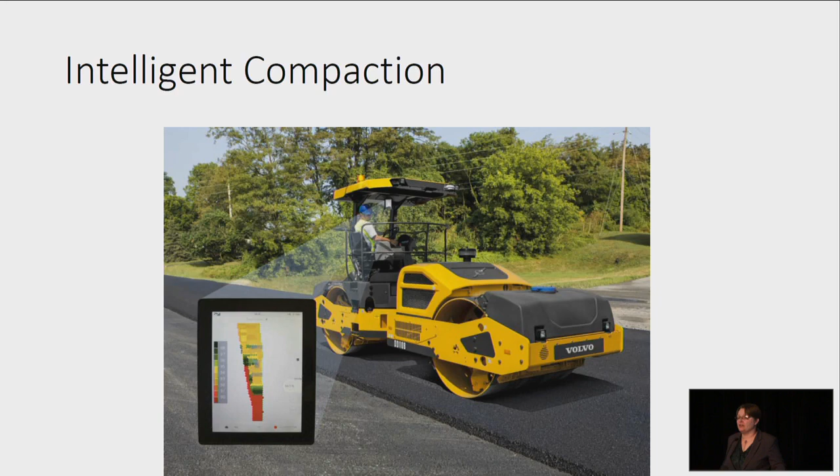Density feedback. No more waiting for a nuclear gauge test result, no more waiting for a core that has to be run to the lab, dried back to get your density. You know what it is that day.

As a contractor, the ability to know things immediately is huge. There are many times when we're running blind for one or two days because we can't get the data back, and we just keep running and crossing our fingers. It's not a good place for the contractor to be, and it's not a good place for the owner to be. If we can get information quicker, faster, it will make us better and faster.

Taking it the next step again, now that we have automated density, assuming we're going to get there, let's have autonomous rollers. If we have automated information about what our density is, and we have automated information about how many roller passes we have, we can make an autonomous roller. When you talk about GPS systems and making things scalable, it's key that we have a lot of other things in place, but this is pretty exciting.

And we take this to the next level. We have autonomous pavers, we have autonomous haul trucks, all integrated, all knowing exactly where everything is. The pavers can know exactly what speed they need to go because they know when the trucks are coming and when they're not. This could virtually eliminate stopping and restarting pavers.

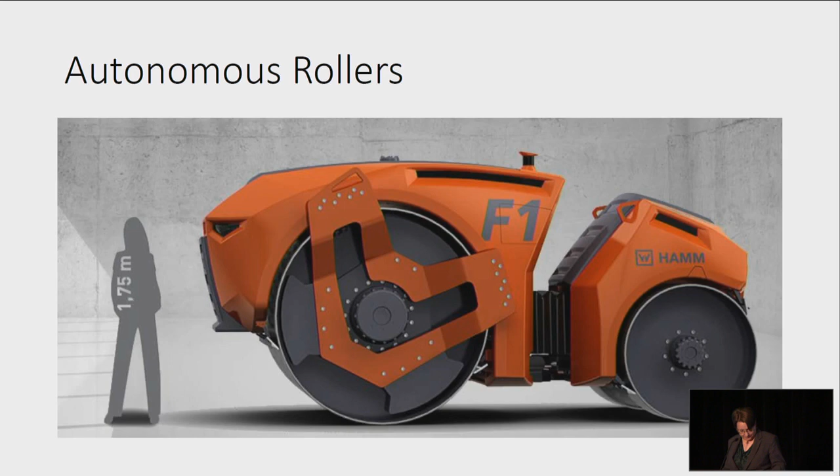This is happening today. Driverless trucks are already a thing at this mine. They don't even think about it anymore, it's just what they do every day. I'm excited for the day when I can say that our industry is at this level - our quarries and mines have driverless mining trucks that are eliminating human error and making the job site safer for people.

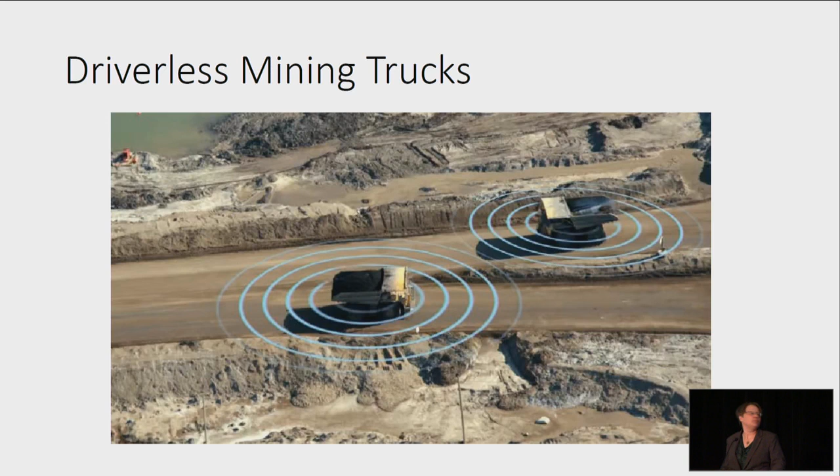Last thing I'm just going to touch on very briefly is drones. Drones are fun, they've been adopted pretty quickly. I even own a little one, although I can't really fly it, I pretend to. But these were an easy thing to adopt because people really liked them. You could get really good pictures, they were easy to promote.

And they can really be used to make our 3D mapping and paving even better. We can use them to map our quarries, get the sizes of our plant stockpiles. And once we start doing that, we can continue to automate because we know what our supply is and our stock is at all times. So I'm not too worried about these getting adopted, but I do think they are a key component of all the pieces coming together.

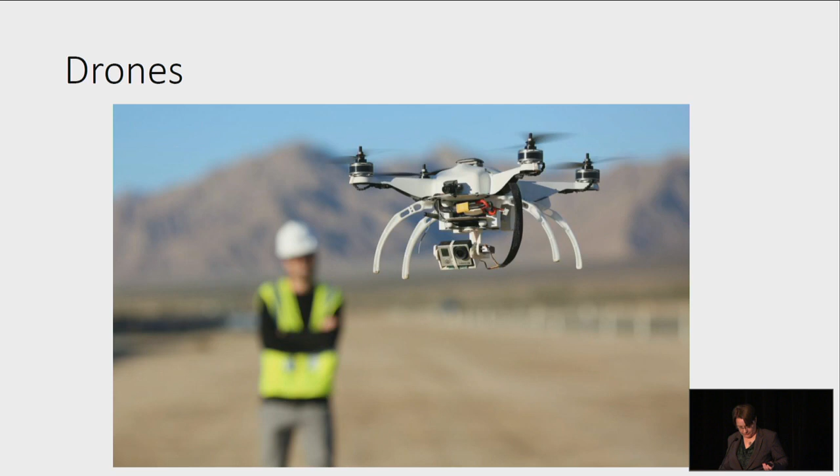We come up with an idea, we innovate it. Now who's going to use it? Who's going to be the first person to take it out of the box and try it? And those are innovators. I want to be very careful - innovators are not necessarily the people who innovated, not necessarily the ones who came up with the idea, but they're the first ones who are going to try it. They're a very important component of making sure that our automation takes off and works.

This group has a very high risk profile, but with that comes a lot of reward.

Over the last few years, I've been working pretty hard on being a better manager, it's been one of my goals lately. While I do that, I read a lot of books, I read a lot of articles. One of the things I read was that to be a successful manager, you only have to be right 60% of the time. I didn't believe it, I talked to a lot of people about it - 60%? That's not even passing. How can you be successful if you're only at 60%?

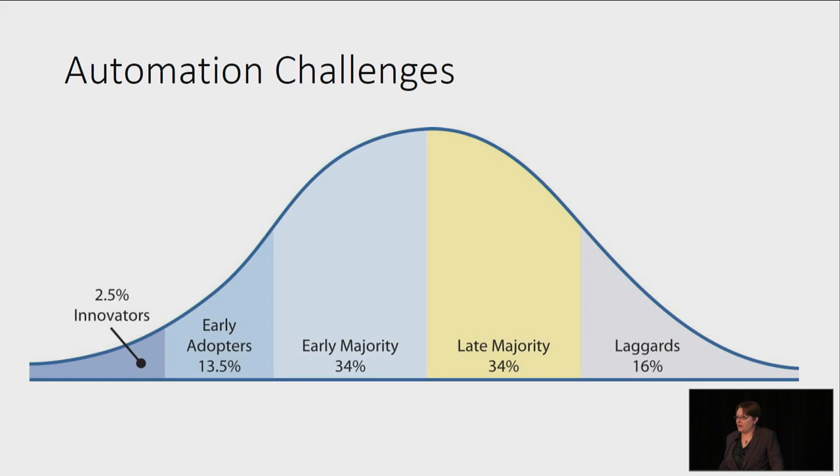The more I thought about it and the more I read about innovators, they are the most successful, the most profitable, and their companies do the best. And they were only right 60% of the time. It's just enough over 50 that it makes you better and faster, and it balances out the 40% you got wrong.

So if you're doing things right, 40% of the ideas you've tried are sitting in your lab, sitting at your company, not being used. We need to allow ourselves more room for error, more room to be wrong, because most of the time we're going to be right. I know quite a few people in this group, and I have all the confidence in the world that if we're making educated guesses about what technology to move forward, we will be right at least 60% of the time. But we have to give ourselves the leverage to not always be right.

For me personally, that's hard. I'm more of an early adopter. I like to know that something works. I don't mind working through the glitches, I don't mind dealing with problems, but I don't always want to be an early adopter. And I would challenge each and every one of you to try to move up a level on this sociological model.

As I was going through challenges of adoption, I found this modified cycle, and it talks about the overhype that happens when a new product comes out. If a product becomes overhyped, it can create a chasm between the early adopters and the early majority. What happens is the innovators talk so much about the product and tell everybody how great it's going to be that by the time the early adopters get it, they're just disappointed because it didn't hold up to the expectations they were told.

I really like to overhype things. I think it helps sell them. Dan will appreciate this: one of my key phrases over the last few years has been 'Lestrada for life.' As I've been trying to get that software off the ground, I overhype stuff constantly, and I have disappointed customers on a regular basis. So talking about myself again, and this being one of my challenges, I just want to make sure that when we're talking about automation, we make sure we're realistic about it, because we don't want to create this chasm, this delay in our automation.

One example I feel like in this industry is warm mix asphalt. 10 years ago, everybody was talking about warm mix asphalt. It was going to be the next big thing. It's been used, but I don't think it's reached its full potential. I think we're in this chasm where we have the early adopters using it, but I don't feel like the early majority has yet. It was overhyped. We were told it would save us all kinds of money, and it just isn't delivering on the hype. So I think this is something we can all work on, to make sure the products we're talking about and the things we're trying to deliver have realistic expectations to them.

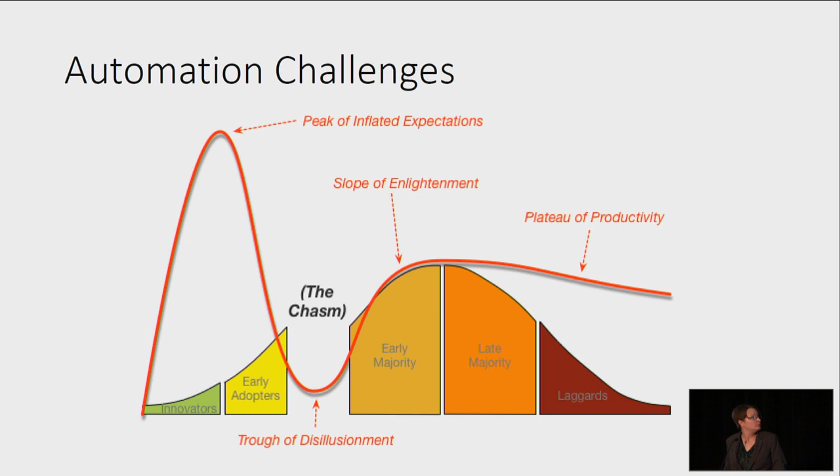Another automation challenge is training. When we automate, our employees will have changing roles. It's just a fact, there's nothing to be done about it. We have to work within that system. One of the more recent major shifts in industry, where there were significantly fewer jobs available than we will see in this shift, is farming.

In 1910, less than 20% of 14 to 17-year-olds were in high school. Our government at the time looked around and realized what was coming. They realized farming jobs were going to decline precipitously over the next century, and they invested heavily in secondary education. By 1940, just 30 years later, over 70% of 14 to 17-year-olds were in high school.

I can speak personally to this. My dad grew up on a farm in the 50s and 60s, and he tells stories about not going to school in the spring and the fall because he had to be home to help with chores. There were fields to plant in the spring and fields to harvest in the fall, and the automation was not available where he could go to school. So he stayed home and helped on the farm and went to school in the winter.